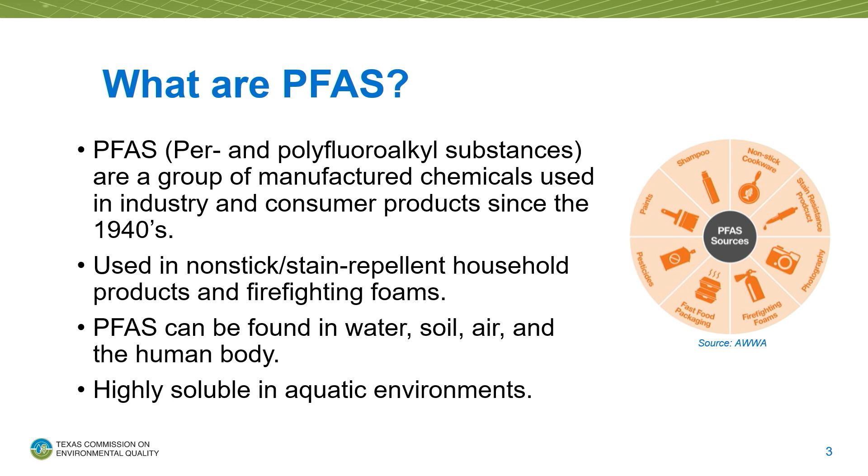Some of the more common names that have been associated with PFAS are Teflon and Scotchgard. These chemicals have been used since the 40s and 50s in consumer products, and also in food products such as lining for popcorn bags. Because it is very soluble and very persistent, PFAS has been found in soil, in water, in the air, and also in human blood. There's been toxicology reports and research on that, which led the EPA to regulate this as a contaminant.

Typically in treatment and in research, the PFAS characteristics will be related to the structure and chemical composition of the actual chemical, basically how many carbons there are in the carbon fluorine bond. Typically they're categorized into 2 categories. One are long-chain PFAS, which typically means the chain has more than 7 carbons. And then you have short-chain PFAS, which have 6 or less carbons in the chain.

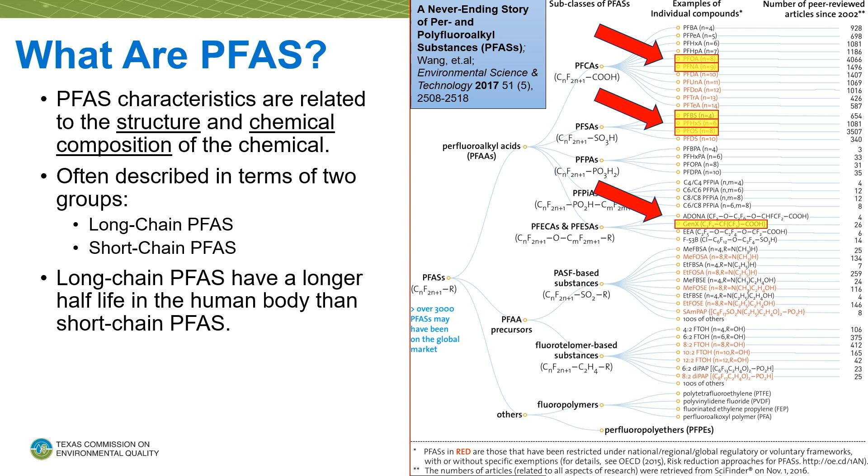As Matt mentioned yesterday, the long-chain PFAS tend to have a longer half-life in the human body than short-chain PFAS. This is important because some treatment technologies are more effective for removing long chain than short chain. So it's important to make this distinction early on to see which treatments are available depending on what type of PFAS you have in your water.

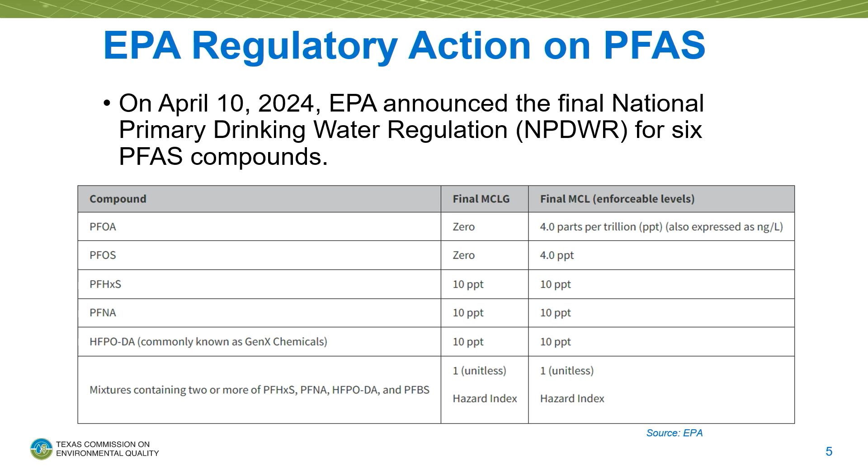As Matt showed yesterday, these are the 6 PFAS that are currently being regulated, and these are the final MCLs pushed through by the EPA. There's 6 PFAS compounds, 5 that have their own specific MCL, which are the first 5 on that table. The last is a hazard index, which is a mix of concentrations of these other shorter chain PFAS. If you exceed the hazard index of 1, then you are not in compliance with that part of the MCL. A question was raised yesterday about the fact that EPA is regulating this to the parts per trillion.

The good news is that PFAS has been phased out. There has been history and legal precedents with the EPA where 3M and DuPont decided to begin phasing out PFOA and PFOS in their products, ultimately to the point where they stopped making them. Unfortunately, GenX PFAS chemicals were actually created as a replacement for the longer chain legacy PFAS, and those did not turn out to be as healthy either. So now the short chain, which are 2 of those, and the GenX chemicals do have their own MCL as well.

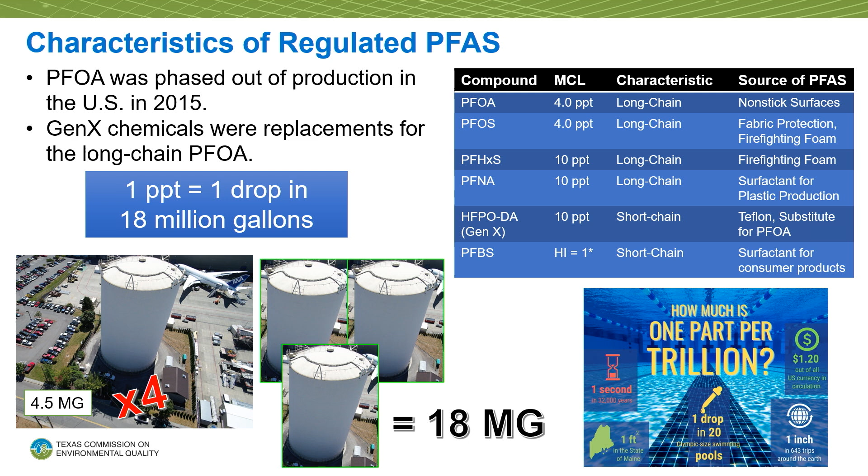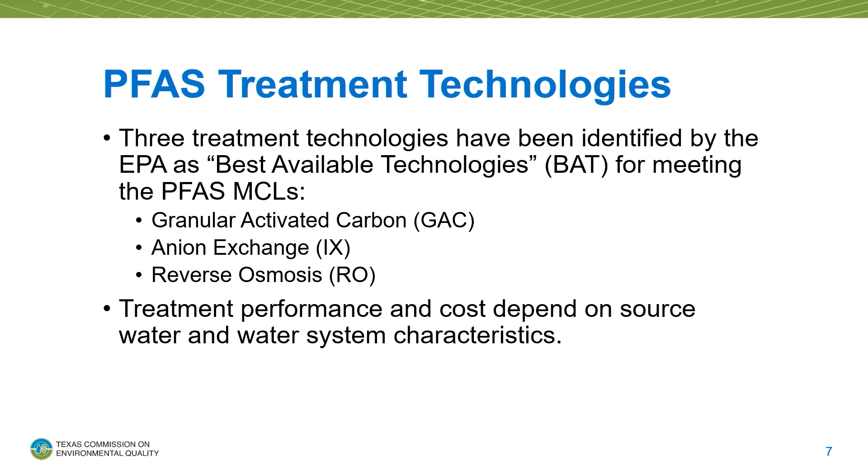So with the rule language that was put out by EPA, the regulation also explained that the EPA has identified 3 treatment technologies known as best available technologies for removing PFAS from drinking water or your source water: granular activated carbon, or GAC, anion exchange, IX, and reverse osmosis, RO.

One of the first questions you get asked is, which is the best one that I can use? Really, the treatment you pick is going to be specific to your source water, the concentration of PFAS in your water, how many, and whether they're mostly short chain or long chain. It will also depend on cost and footprint. So there are a lot of considerations systems will need to think about when they begin evaluating treatment technology to remove PFAS.

Essentially, as PFAS moves through a vessel that has GAC contained in it, it's mostly effective for longer chain over short chain, but a lot of that is the polarity of these chemicals, and these compounds will stick to the surface of GAC. It's one of the most researched treatment technologies out there, can be one of the most cost-effective, and it's one that most systems are familiar with.

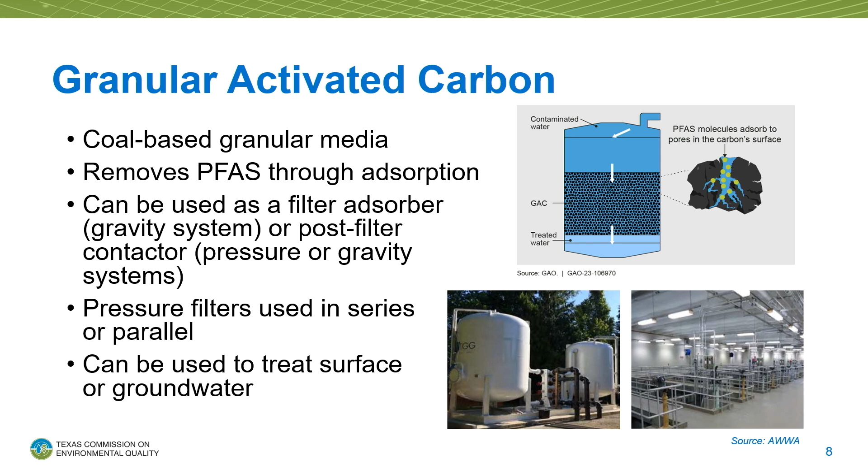GAC can be used for PFAS treatment either as a filter adsorber, which I will talk about in the next slide, or as a post-filter contactor. Those are the 2 terminologies you will hear in terms of GAC treatment for PFAS. There are also pressure filters if you're using GAC under pressure, and there have been several case studies where GAC has been evaluated in pressure vessels operated in series or in parallel. GAC can be used to treat PFAS found in groundwater or in surface water.

So the first category of how GAC is used is as a filter adsorber. Typically, in the filter beds of your surface water plant, you start replacing some of the media in your filters with GAC. It could be a replacement for, say, anthracite, or it could be an additional bed of media to address PFAS treatment. Because these are filter galleries, this treatment is typically considered gravity fed.

And so we'll talk about that in the next couple of slides. The other way that GAC is used is as a post-filter contactor, and that could either be gravity-fed or it could be a pressure vessel with GAC. But typically, these are located after your treatment process, kind of as a finisher to go ahead and remove any high levels of PFAS that you have in your water.

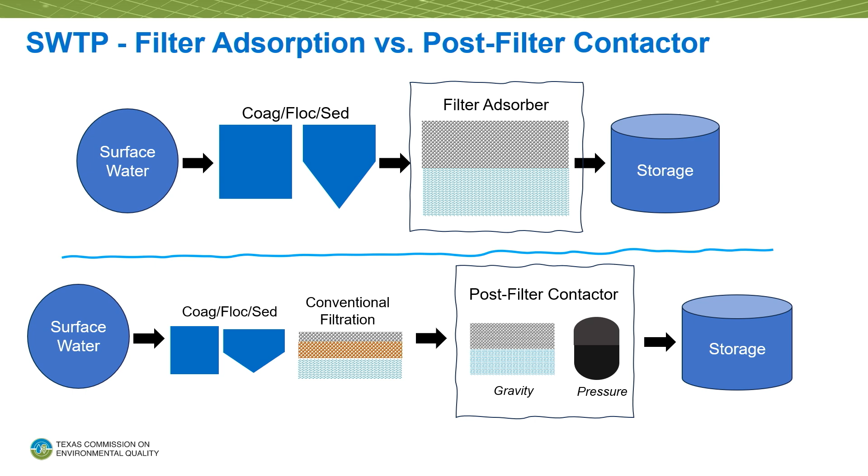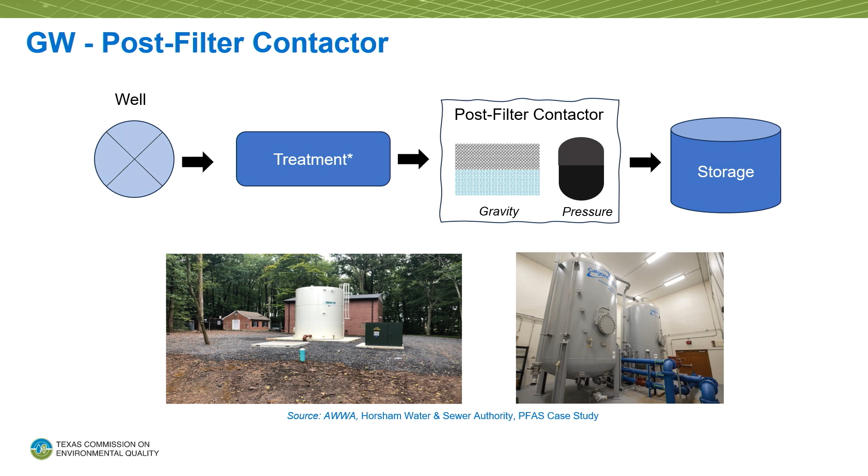The pictures shown here, the one on the left is an example of a gravity-fed post-filter contactor for a groundwater plant. And the one to the right shows two pressure filters, or pressure vessels, used at a groundwater plant for PFAS removal. So this is just a visual to show what some of these treatments actually look like out in the field in practice.

And so a lot of the research and studies are showing that GAC can be really effective for the removal of your long-chain PFAS. And there is moderate removal of the short-chain compounds. Adding some of these pressure vessels or filter systems, they may not take as much of a footprint, so that's a good advantage for using GAC if you have limited space in your plant but need to have this treatment put in. A lot of these vessels do not require a very large footprint.

Using GAC for PFAS removal will also give you some advantages in removing additional constituents for taste and odor, and for dissolved organic carbons and total organic carbons as well. There will also be a likely impact on corrosivity using GAC, so that is also another advantage to consider.

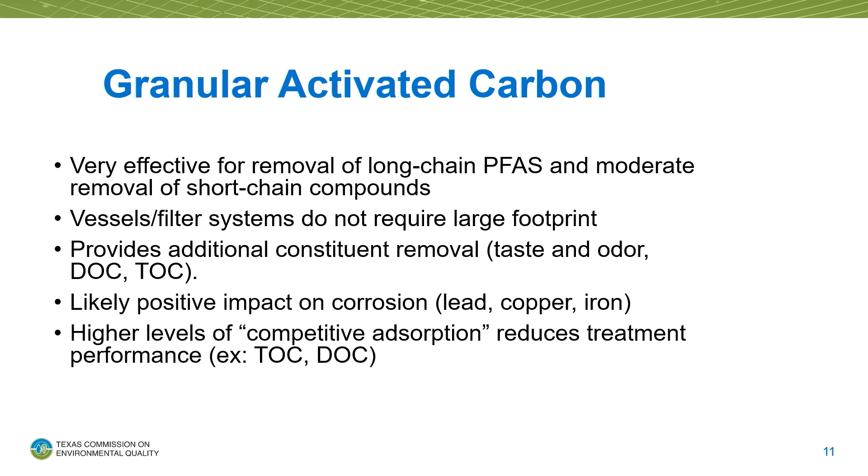One of the things that is asked is what are some of the interferences using GAC for PFAS removal? And what we've seen in the studies is your DOC and especially your TOC levels is what will make or break using GAC, because those types of analytes will tend to compete with PFAS to get adsorbed by the GAC itself. So analyzing your source water is going to be really important to ensure that you don't have some of these other analytes that might compete with PFAS in trying to get to the actual GAC through adsorption.

So that being said, for systems that want to use GAC either through gravity or post-filter or through conventional, replacing your filter bed in your surface water plant, these treatment technologies will require an exception for innovative alternate treatment under the rule listed here. And these requirements will encompass the system providing data from a pilot study to approve the technology for removing PFAS. Exceptions for the use of these treatments will be required before plan review submittal.

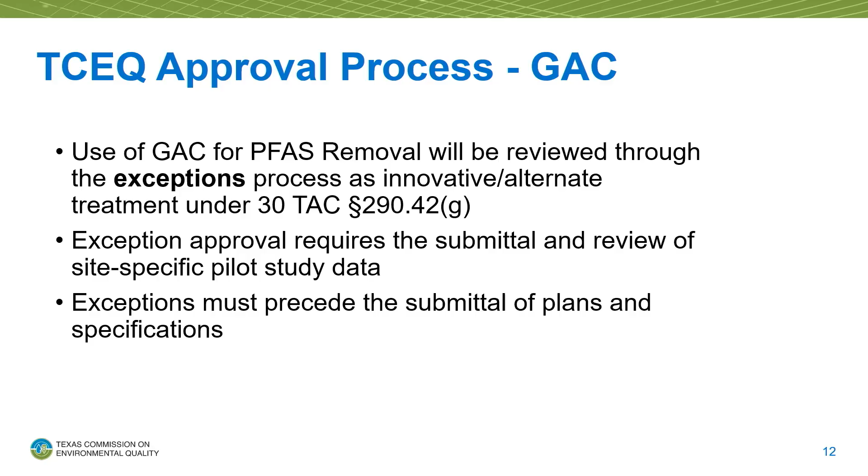So just to think ahead, if this is one of the technologies that you want to use, keep in mind that there will be some pilot study data that will need to be submitted for approval, and that you will need to go through the exceptions process before getting that treatment approved through the plan review process.

So what would an exception, or the approval, look like? Well, first, we would need to submit a pilot study protocol for approval, and a protocol is basically a plan of how you're going to conduct this experiment to see if this particular treatment technology is going to work for your source water. And so the approval process will consist of sending us a copy of that protocol. The TCEQ will review that under the exceptions process and will approve the protocol.

And at that point, you will go ahead and conduct your study. You will collect your data and your results and summarize that and send that to us in a report for us to review for final approval. And once that exception after that pilot study is granted, then at that point is when you can go to the plan review process and get plans and specifications approved for your treatment.

So now we're moving on from GAC to ion exchange. This is the second technology that the EPA has listed as the best available technology. And I'm not sure how many of you here are familiar with ion exchange, but we've seen this treatment technology for removing arsenic, removing nitrates, and some other constituents in groundwater. And so the way that ion exchange works is basically you also have a type of vessel with, instead of GAC in there, a PFAS-specific resin, or a resin that has been designed for PFAS removal.

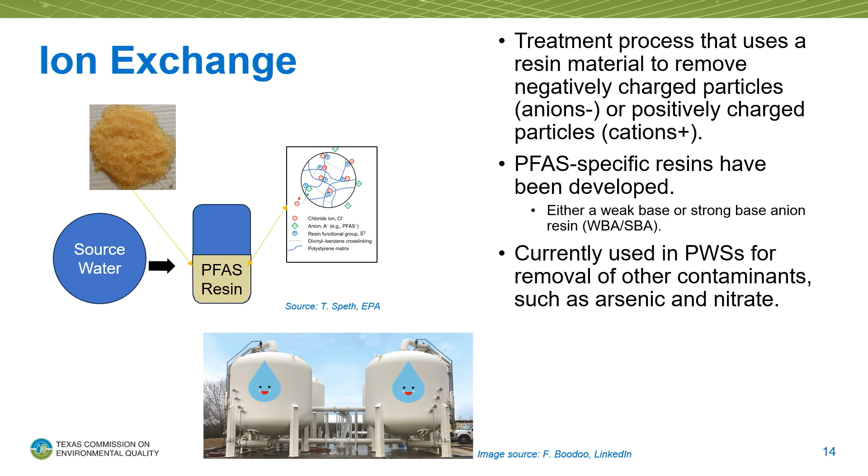And the way that that works is just through positive and negative ions that are in the water, and the resin will attract the PFAS chemicals through the adsorption process with the ion exchange resin that's designed for PFAS removal. So there are some that have been developed. They're categorized into a weak base or a strong base type of resin, but there are several companies out there that do have PFAS resins for ion exchange, and some have already been in use in other states in this country where PFAS is already a state-regulated chemical.

And so one of the important design parameters that really needs to be figured out when you're doing a pilot scale test is determining the depth of ion exchange resin that you're going to need, and then some design operating parameters such as empty bed contact time that will be sufficient for removing PFAS. And so very similar to GAC, as water goes through your column with the PFAS resin in there, the PFAS compounds will adsorb or stick to the resin. But much like GAC, there are going to be some competing anions that will fight with PFAS to adsorb to the resin. And so some of those are listed here: nitrate, bicarbonate, and sulfate.

And the depth of resin that you're going to need for effective removal is going to depend on your empty bed contact time. And so this visual to the right of the slide gives you an idea of what we mean by empty bed contact time. That is the length of time that your water goes from the beginning to the very bottom of the vessel, so the amount of time that the water is in contact with that resin as it passes through the vessel. And so if you have longer empty bed contact times, odds are you will have better removal efficiencies because there is just more time that the water is passing through the resins.

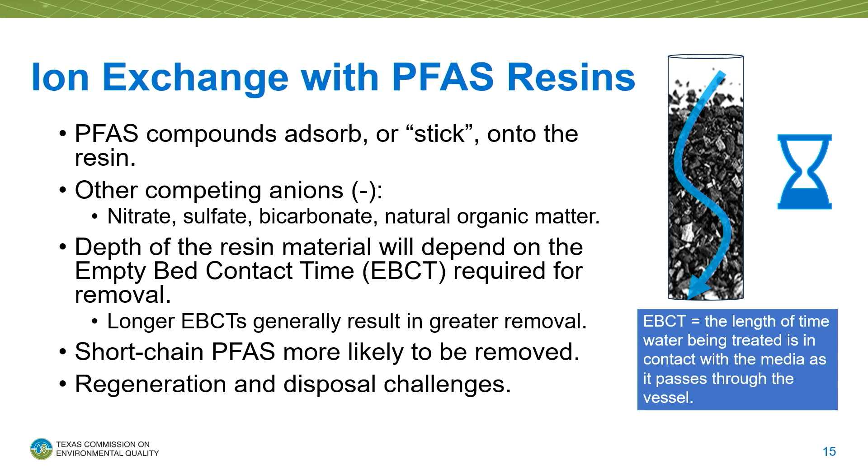One of the advantages of ion exchange is that it actually is shown to be successful for removing those short-chain PFAS. So whereas GAC may not be as effective for short chains, ion exchange has shown to be pretty successful. And so this is where, again, characterizing your source water to see which is your more competing PFAS chemical and whether it's short chain or long chain is really important when you're trying to pick out a treatment.

One of the downfalls with using ion exchange has been disposing of regeneration waste. And so this is an area of research that's also been conducted in terms of how do you dispose waste from these ion exchange vessels, either through disposal or incineration. So that's one of the other areas right now that's been doing some research, finding a safe way to dispose of the spent media from these treatment technologies.

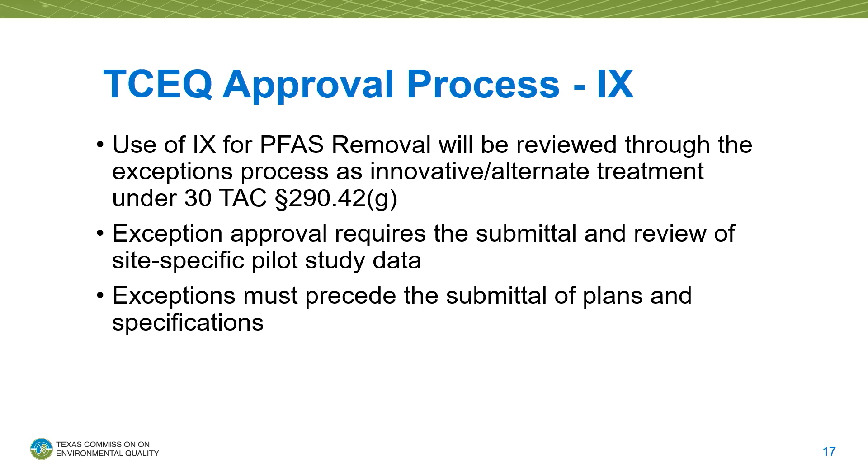And so similar to the use of GAC for PFAS, the use of ion exchange for PFAS removal is also going to require an exception before you submit plans and specifications. And again, similar to the GAC process, it would entail submitting a pilot scale protocol for our review, and then conducting the experiment and collecting your data in a report for our approval. And once that final exception is approved, which will list a lot of the operating parameters that were validated during the study, at that point is when you would submit plans and specifications for approval.

And so now moving over to reverse osmosis, RO, for PFAS removal. And I think a lot of systems may be more familiar with RO. It's typically used for treating brackish water, but it has shown to be very effective in removing PFAS because it could pretty much remove anything. So it has been effective to remove both long chain and short chain PFAS. And really, it's through size exclusion, that's the primary mechanism of removal, just because of nanofiltration and how small those filters actually are.

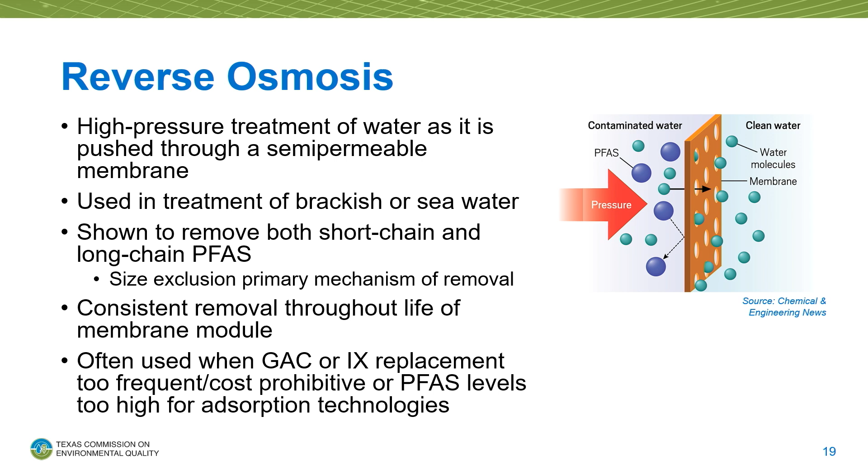Reverse osmosis has been used whenever GAC or ion exchange replacement has been too frequent. Like if you have really high concentration of PFAS and you end up finding that using GAC or ion exchange would require you to change out or regenerate your media frequently to the point where it's not cost effective. And this is when some systems will turn over to RO to go ahead and have that be a treatment to exclude both your long chain and your short chain PFAS compounds.

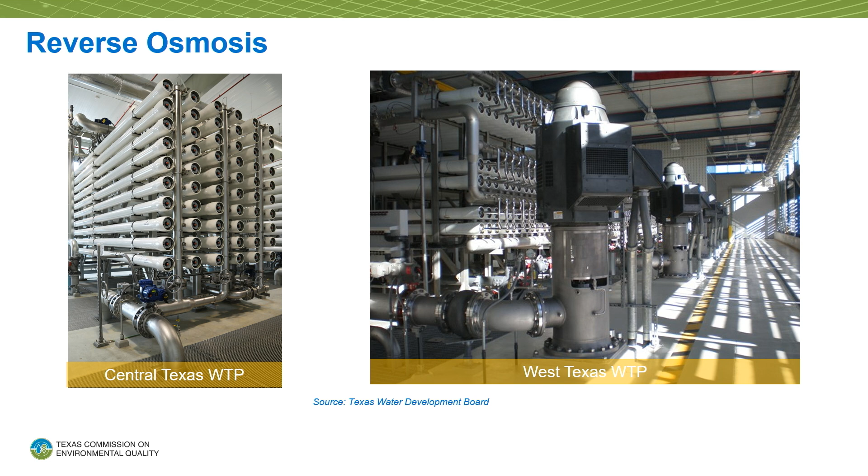And lucky for you guys, if you propose to use RO for PFAS removal, we will not require an exception for that. It will only require plan review approval, and we have actual rules specific to RO for the use of treatment in Chapter 290 rules. And so what that would look like is it would also entail a two-step approval through the plan review team, where you would first submit a submittal for construction review and approval, and that would include providing an engineering report and plans and specifications of your design.

And your step 2 approval will be once you're ready to request to actually use the treatment. And at that point, it would entail an engineering report, some baseline data, and then some chemical analysis from the raw water and from the permeate.

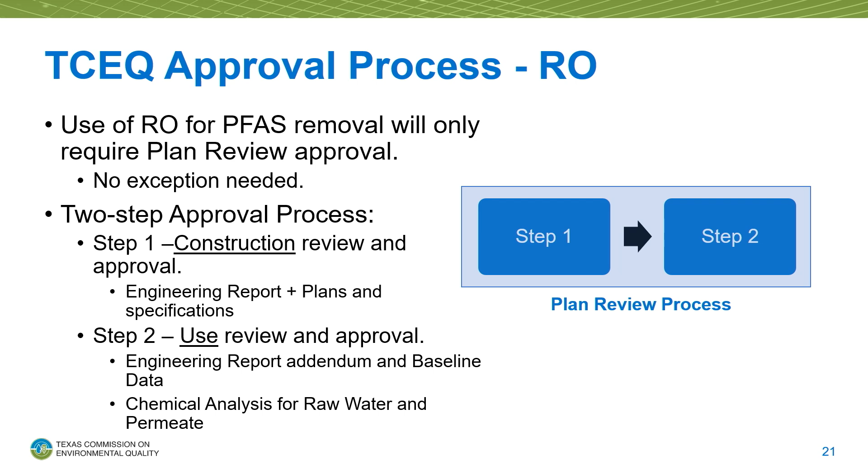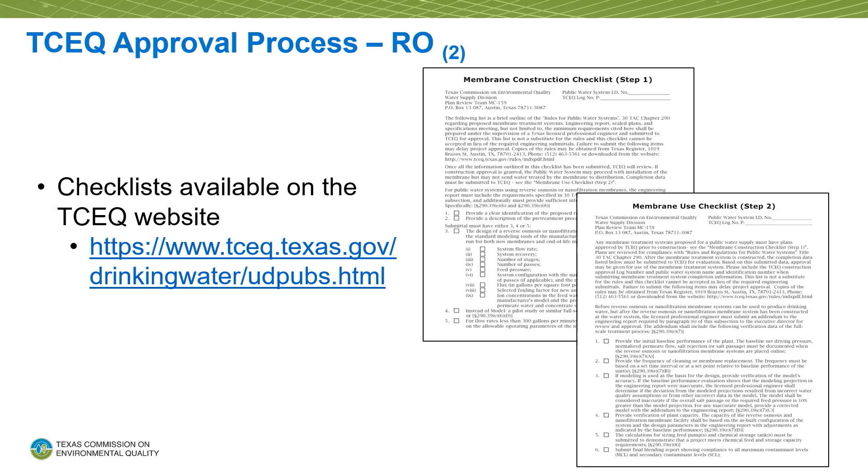Now, this next slide is sourcing from Thomas Speth, who is a researcher with the EPA, and this is from one of his ASDWA webinar series in 2024. So I relied on the expert to give us some numbers here in terms of the effectiveness of using GAC, ion exchange, and RO for PFAS. I know there are questions about PAC use, and I believe that there are some studies out there that show that PAC may be effective, but the dose that you would need to achieve removal can be pretty high and not really cost effective for some systems.

Some of the treatments that are ineffective are conventional treatment and low pressure membranes, which are your MF, UF, microfiltration or ultrafiltration membranes, which are not nanofiltration. Those haven't been shown to be very effective just because of size exclusion; the PFAS compounds are just too small. Biological treatments such as slow sand filtration have not been shown to be effective, as well as disinfection, oxidation, and advanced oxidation.

And some of the treatments that Mr. Speth listed here to be effective: first one is ion exchange, and it shows that it has about 90 to 99% removal effectiveness. High pressure membranes, which is RO, also show to be about 93 to 99% effective. As you can see here with PAC, 10 to 97% effective, so that's a really wide range. So it's only effective for select applications.

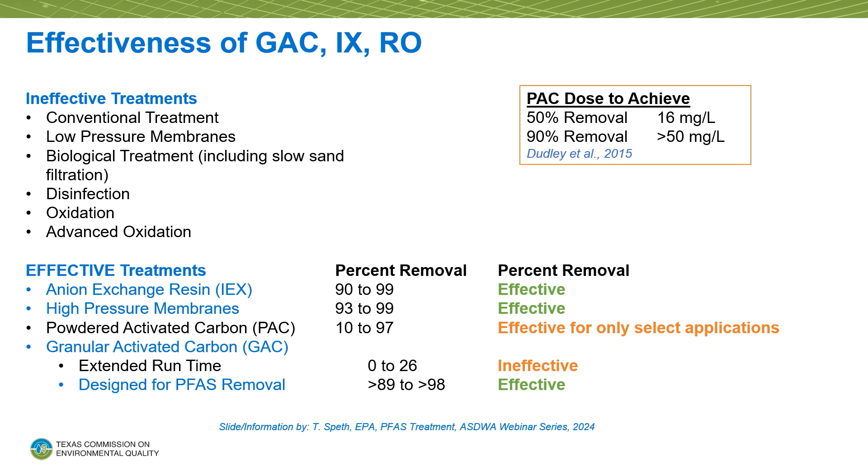And then GAC, if you're using GAC conventionally, it won't be as effective. You do have to select your specific granular size for your GAC depth, depending on empty bed contact time. So basically using GAC that's designed for PFAS, and when it is designed specifically for PFAS removal, it does show to be effective 89 to above 98%.

There's also been an introduction of novel technologies for PFAS removal. So these are outside of GAC, ion exchange, and RO that the EPA has listed as best available technologies. But nonetheless, these are innovative technologies that companies are trying to see if they can be effective for PFAS removal. So some of these resins or technologies are noncarbon-based sorbents.

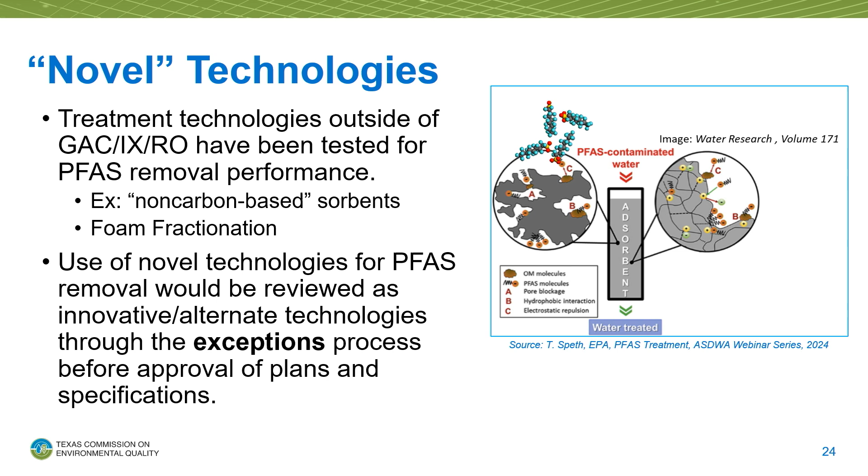There's also the use of foam fractionation, which I kind of read up on, and it's a type of physical separation process, which doesn't seem to be very practical just first thinking about it, but there is research on these types of novel technologies just to have more options for other systems. And so in the event that a public water system would like to use a novel technology for PFAS removal, then that would have to go through the exceptions process before the approval of plans and specifications.

Review timelines are different for exception requests and plan reviews. Exception requests are subject to a 100-day review period. And once you have your exceptions completed, approved, and you're ready to go through the plan approval process, then that plan approval process is a 60-day review period.

If, for example, you're using RO and you only need to go to plan review, then you basically cut out that 100-day exception review period and you have a 60-day review period with the plan review team. And as mentioned, because it is in the rule, all exceptions that are required for your project have to be approved before you can submit your plans and specifications to plan review.

So what can you do right now? Matt spoke yesterday about compliance schedules and deadlines. And so I know a lot of people are starting to wake up and realize that this is coming down the chain and there's really not much you can do about it but get ready. So the best thing that you can do is to begin to arm yourself with knowledge and get to know what these PFAS treatment technologies look like.

Start talking to other systems in your area that might be subject to PFAS contamination. If you have a groundwater system, you might want to find another groundwater system about your size, same source water, and get a feel for what those guys are doing to begin addressing this incoming regulation, and how they're planning to implement some sort of treatment for PFAS if it is needed.

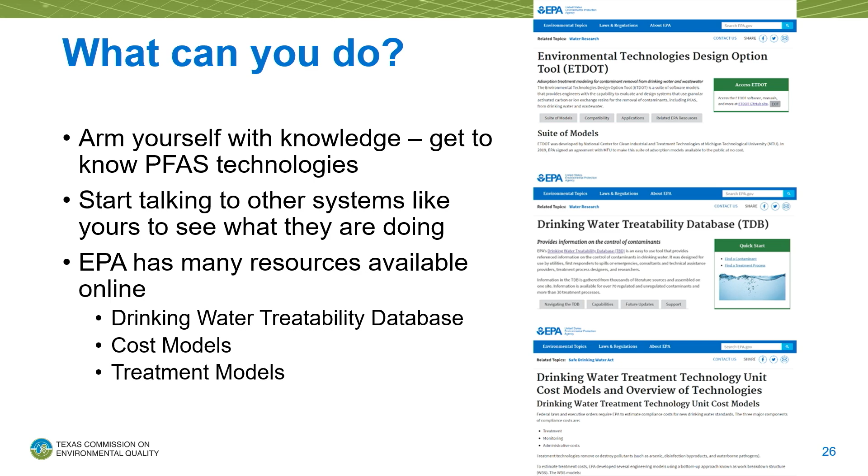There are also cost models. So there's a resource there to get a feel for, if you decide you might have 2 or 3 treatments that you want to try out, how costly it will be to implement those treatments. And there are also treatment models that can be used by engineers to try to figure out whether that specific treatment that they zeroed in on will actually be effective, and then begin to get a feel for the design parameters for that particular treatment.